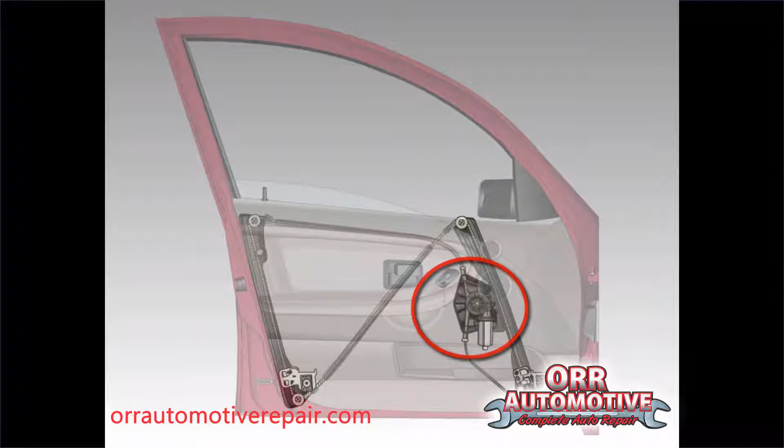The window regulator is connected to the window motor. As the window motor turns, it rotates a large pulley that pulls a cable guided by other pulleys. Window clips attach the window glass to the cable, and as the cable moves, the window is raised and lowered. Reversing the polarity on the window motor changes the direction that the motor turns.

Typical failures of the window regulator include broken clips, pulleys, and cables. Broken clips cause the window to become wedged in an angled position inside the door. Broken pulleys cause the cable to become bound, and the window becomes stuck in place. Broken cables cause the window to drop down into the door.

Another common failure of the power window motor is an overheated motor. Motors can overheat due to internal problems and will not have the power sufficient to raise or sometimes lower the window. As soon as the window motor cools down, the window will raise and lower again for a time until the motor overheats again. Sometimes a window may only travel a very short distance until the window motor overheats.

In some vehicles, the motor and regulator can be replaced independently. However, in most cases, the motor and regulator are replaced only as a complete assembly.

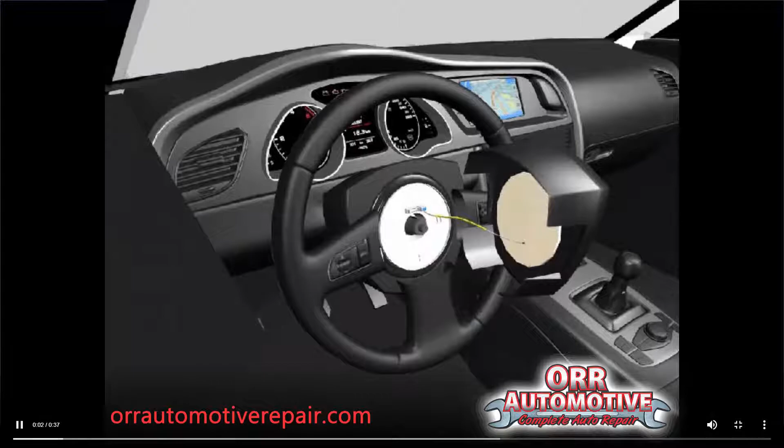The ribbon cable inside a clock spring has multiple copper tracks, allowing the various steering wheel mounted buttons and the airbag to be connected to the wiring harness. When the clock spring is installed, it is normally preset to a middle position that allows the steering wheel to rotate through its full range in both directions, without making the coils of the ribbon cable too tight.

A break in one of the copper tracks of the clock spring ribbon cable will cause the failure of one or more steering wheel buttons, or the airbag circuit. If the airbag circuit fails, the warning light on the instrument panel will illuminate.

Many vehicles use seatbelt pretensioners to reduce injuries in an accident. The pretensioner is usually an explosive charge designed to retract the seatbelt when a crash is detected by the collision impact sensors. When a collision is detected, an explosive charge is detonated, which shoots ball bearings out of a tube.

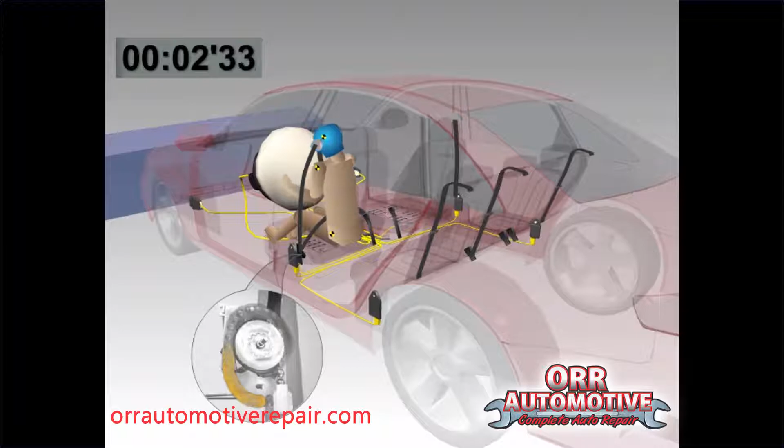As the bearings move past the seatbelt reel, the reel is turned, causing the seatbelt to be retracted and the occupant to be pulled back into their seat. This lessens the effects of whiplash and the potential of injury from the inflating airbag. After a pretensioner has detonated, the seatbelt normally becomes jammed. An exploded pretensioner must always be replaced.

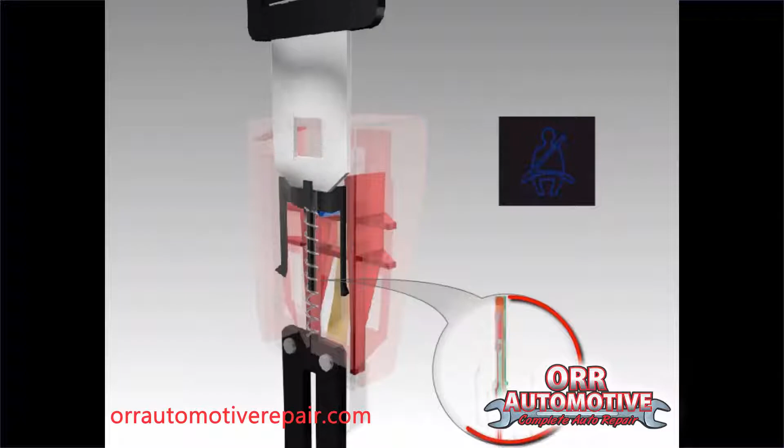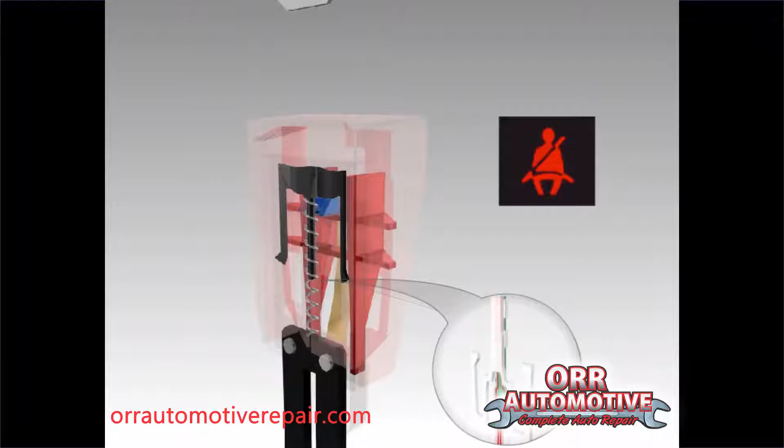The contacts inside the seatbelt latch are usually made up of a copper strip on a small printed circuit board. Releasing the buckle turns the seatbelt light on. Inserting the buckle opens the circuit and turns the light off. Some latches contain two switches. One switch operates the light, and the other sends a signal to the airbag module as to whether the seatbelt is being used.

Many vehicles now use seat occupancy sensors that detect whether the seat is occupied and the approximate weight of the occupant. This information is used to determine whether, or in some cases how quickly, to inflate the airbag and activate seatbelt pretensioners.

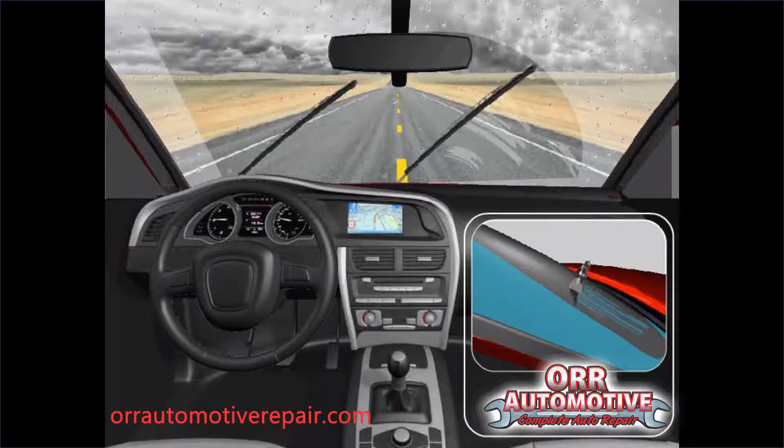Worn wiper blades are usually caused by exposure to sunlight and extreme temperature changes. Blades can fail in many ways, but the most common type of failure is deformation of the wiper blade. This occurs when the wiper blade becomes hardened and retains the curved shape that it takes when the wipers are parked. A wiper in this condition is not able to clean a windshield properly and often skips or chatters across the windshield.

Vehicle headlamps have improved significantly over the years, improving road visibility and safety. The latest technology in headlight systems uses LED lights, which are brighter and more efficient than halogen or high-intensity discharge xenon bulbs. Even when your headlight bulbs are functioning correctly, the amount of light hitting the road can be significantly reduced due to oxidization or discoloration of the headlamp lenses.

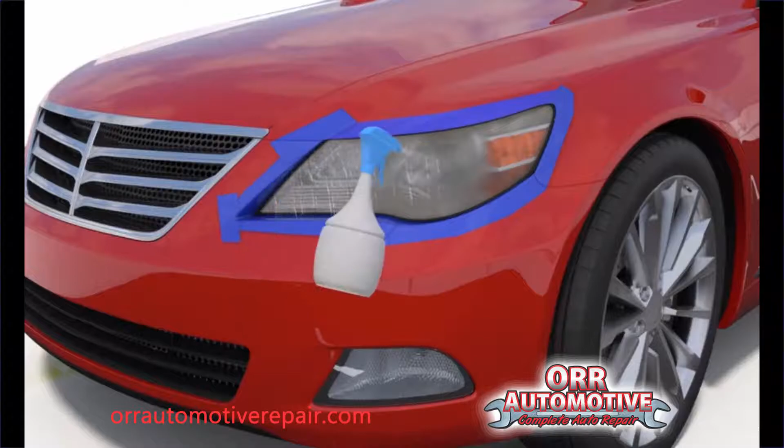Fortunately, it's possible to restore the performance of your car headlamps without replacing the lens. Your technician will mask the body panels around the headlamp to avoid any accidental damage to the paint, use specialized abrasives to remove the oxidized surface on the headlight lens, and then polish the light to restore a clear finish that allows the light from the bulbs to shine through clearly. With restored headlamp lenses, your nighttime view of the road will be much clearer, and your vehicle's appearance will also be refreshed.

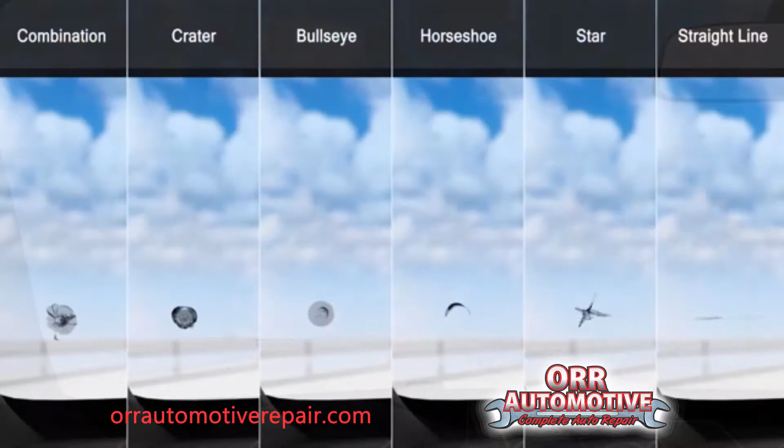Cracked windshields are more susceptible to breakage, provide less support to the airbag in the event of an accident, and reduce visibility. Unrepaired chips can develop into a crack at any time, but especially when the temperature is very hot or cold, resulting in the need to replace the windshield.

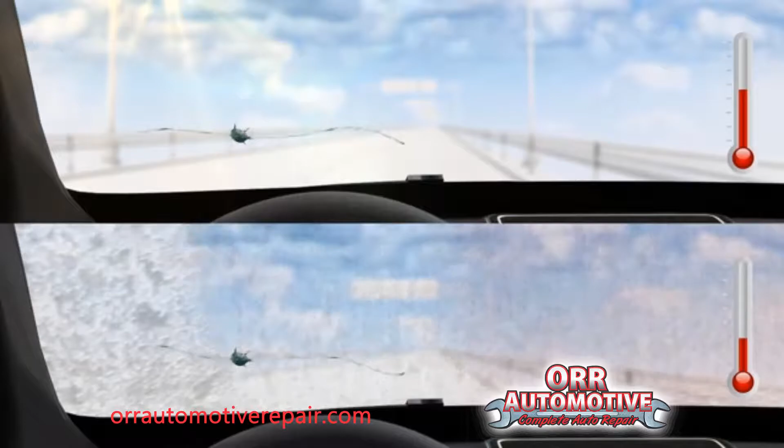The chip can be repaired if the following conditions are met. If the chip is in the driver's line of sight, the diameter must not exceed ½ inch. In other parts of the windshield, the chip diameter must not exceed 1 inch. The chip must be more than 2 inches from the edge of the glass.

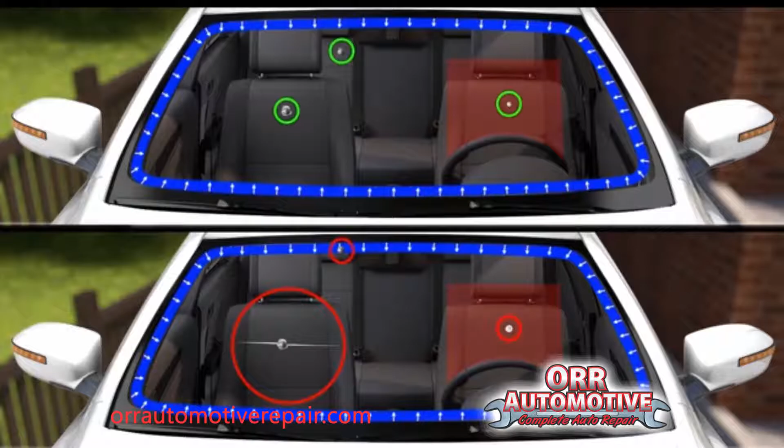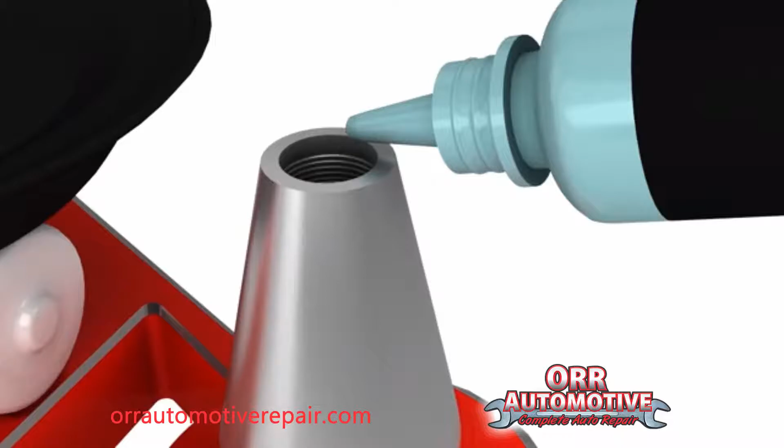The chipped area is prepared by using a cleaning solution, then a special drill to remove loose glass and allow the resin into the damaged area. After the area is prepared, a vacuum device is placed over the chip. With the air removed, the chip is filled with a special resin, and the resin is cured or hardened using

ultraviolet light. To ensure a smooth surface and to remove any excess resin, the windshield is cleaned and polished. After the resin is cured, the windshield will be as strong as it was before it was chipped.

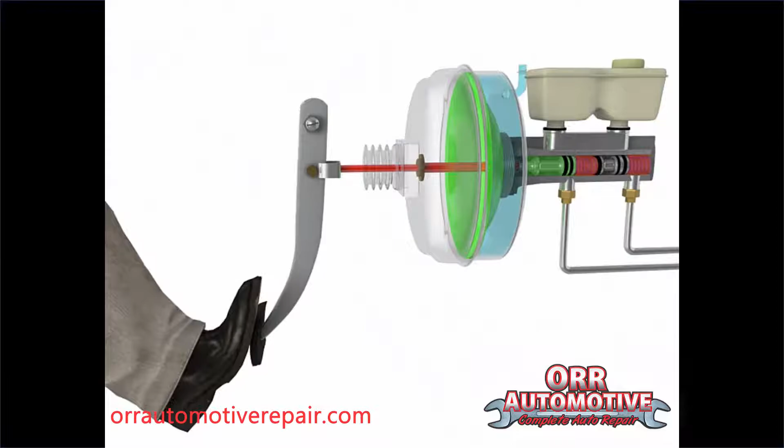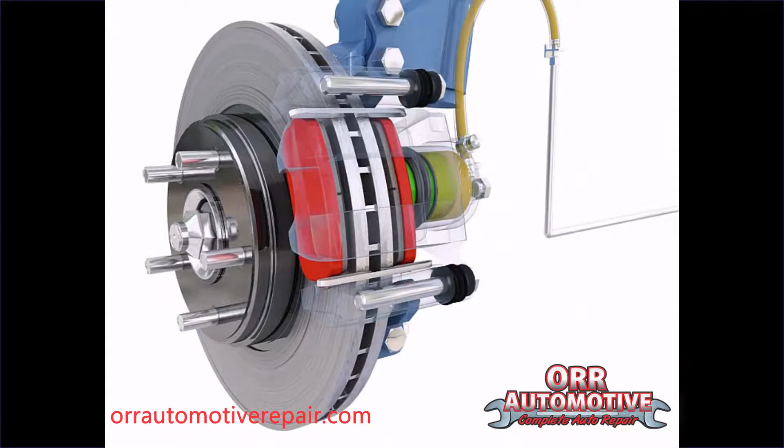Brake systems generally consist of a vacuum booster to assist the driver in pressing the pedal, a brake master cylinder that pressurizes brake fluid when the pedal is pressed, metal brake lines, rubber brake hoses, disc brake systems, and on some cars a drum brake system. Most vehicles also have an ABS system designed to pulse the brakes on a skidding wheel when maximum braking pressure

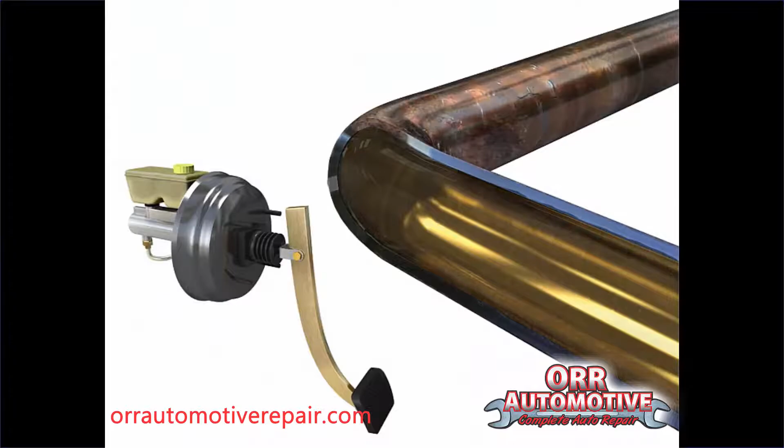is applied. In damp climates and areas where salt is used to de-ice roads, the metal brake lines can become rusted. Failure to replace rusted brake lines can result in the line rupturing under pressure, allowing the brake fluid to leak out of the system.

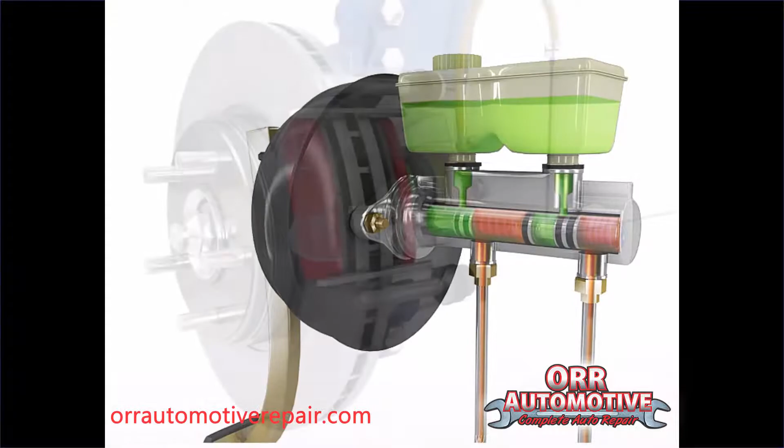When the driver presses the brake pedal, pressurized brake fluid forces the piston inside the disc brake caliper to move outwards. This forces the brake pads to push against the brake rotor. The brake pad has a block of friction material fastened to a metal backing plate. The friction material may be a ceramic, semi-metallic, or organic compound. The friction material wears out after many stops, at which time the brakes need to be serviced.

The piston inside the caliper has 2 rubber seals. The outer seal, or dust boot, prevents debris and moisture from entering the caliper. The inner seal, or square-cut seal, traps brake fluid inside the caliper. When the brakes are applied, the square-cut seal twists inside a groove in the caliper and then helps the piston to be retracted when the pedal is released.

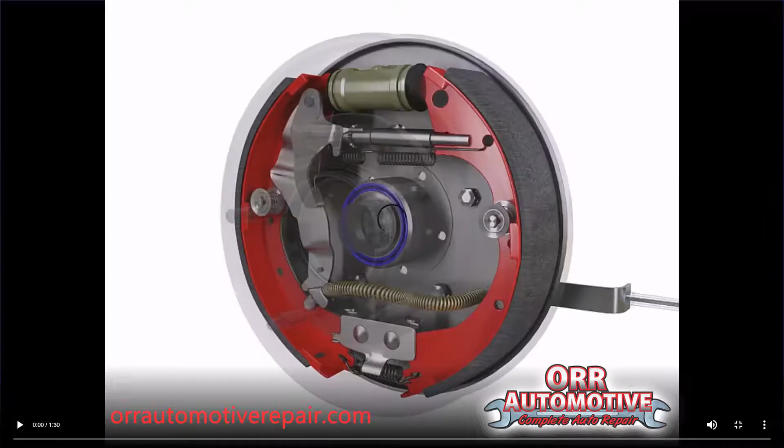The drum brake system includes a brake drum, hydraulic wheel cylinder, brake shoes, and return springs. Drum brakes are generally used to stop the rear wheels on older and lower performance vehicles. The drum is connected to either the rear axle or a wheel hub, and the wheel is bolted onto the drum. When the brake pedal is pressed, the pistons in the wheel cylinder move outwards as a result of the

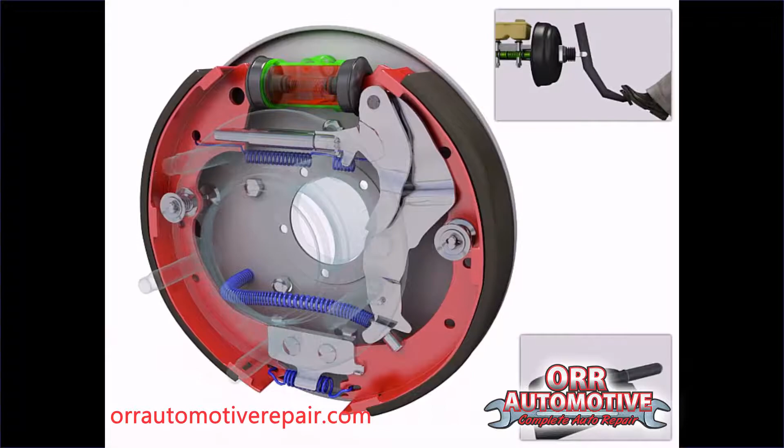brake fluid being pressurized. The brake shoes are forced against the inside surface of the brake drum in order to stop it from turning. This friction causes the lining on the brake shoe to gradually wear out, at which time the brake shoes should be replaced.

It is important that when brake shoes are replaced, brake hardware, including the brake return springs, should be checked for rust. Rusty return springs can break, allowing the brake shoes to remain in contact with the brake drum when the brakes are not applied, and causing the brake shoes to wear out prematurely.

A common failure of the drum brake system is a leaking wheel cylinder. When the seals around the wheel cylinder pistons start to deteriorate with age, brake fluid can leak past and start to contaminate the brake components. Once brake linings become soaked with brake fluid, they must be replaced.

Another failure of the drum brake system is an out-of-round brake drum. This occurs when the drum becomes more oval-shaped than perfectly round and can cause the brake pedal to pulsate under braking.

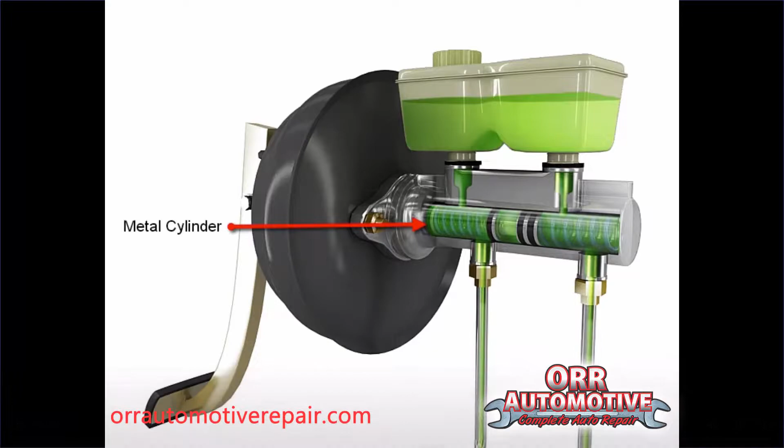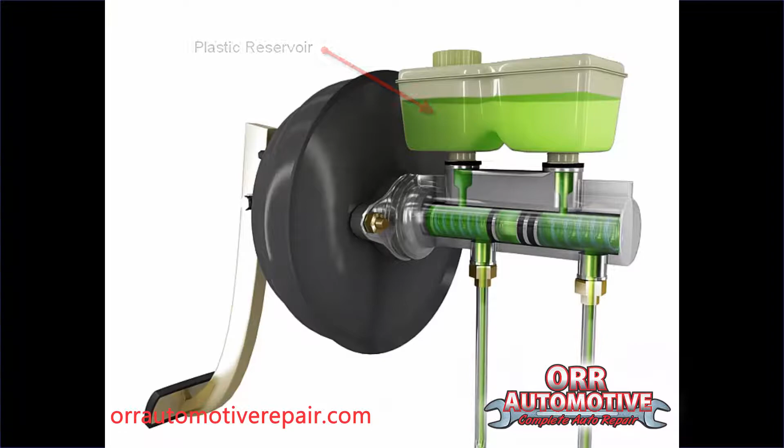The brake master cylinder assembly is a metal cylinder containing 2 pistons with seals and springs, with a plastic fluid reservoir located on the top of the metal cylinder. The brake master cylinder is usually located at the back of the engine compartment, on the driver's side of the car. When the driver pushes on the brake pedal, a rod from the pedal to the brake master cylinder forces the pistons inside the master cylinder to compress the hydraulic brake fluid. The pressurized fluid, in turn, forces the brakes on each wheel to apply.

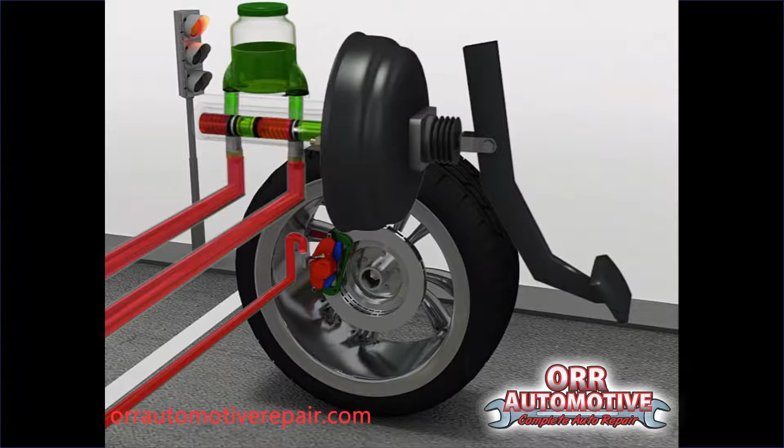Leaking seals inside the brake master cylinder can result in the brake pedal moving to the floor when the brakes are applied. A small leak normally makes the brake pedal slowly drift to the floor when sitting at traffic lights with the brakes applied. A major leak will cause the pedal to move to the floor quickly with the brakes failing to apply. When there is a leak somewhere in the brake system, either in a hose, line, caliper, or wheel cylinder, the brake master cylinder is unable to pressurize the brake circuit.

This video shows a crack in the metal line exiting the master cylinder. When a leak like this occurs, the brake pedal will often move much further than normal before the remaining functioning circuit is applied. As fluid continues to leak, the fluid level in the reservoir will start to fall, and the problem should be repaired before driving the vehicle any further.

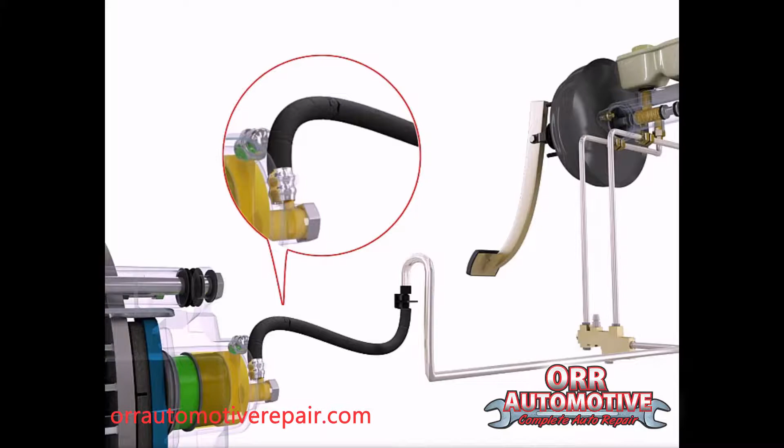Because wheels move in relation to the body of the vehicle as the suspension is compressed or the steering wheel is turned, a flexible brake hose is used to connect the steel brake lines to the calipers on each wheel. The brake hose is made up of three main components: an inner rubber hose, which contains the brake fluid, a steel braid that reinforces the inner hose so that it does not expand under the pressure generated when the brakes are applied, and an outer protective layer which keeps moisture off the steel braid and protects the hose from road debris.

When the outer layer cracks, moisture can enter the brake hose, allowing rust to develop on the steel braid. With a weakened steel braid, it is possible for the inner hose to expand like a balloon when the brakes are applied, leading to a potential rupture and the loss of brake fluid, and therefore stopping power. Once a brake line has ruptured, the brake system will not be able to build up sufficient pressure to stop the vehicle. To prevent the risk of brake fluid loss, brake hoses should always be replaced at the first sign of cracking in the outer layer.

When the brakes are applied, the brake caliper needs to be able to move freely so that even pressure is applied to both brake pads. This is done by mounting the caliper on slider bolts, smooth bolts coated in grease that can move freely in and out of the brake caliper mounting bracket. These bolts are protected by a rubber boot that keeps the grease in and contaminants out. When the boot is ripped, grease can escape and water can enter, causing the bolt to become seized in place.

When only one slider bolt becomes seized, it can cause the brake pads to wear at an angle. When both slider bolts become seized, the caliper is unable to move freely, which puts constant pressure on the inner brake pad, causing it to wear out sooner than the outside pad. If the caliper slider bolts become seized, the brake caliper should be replaced.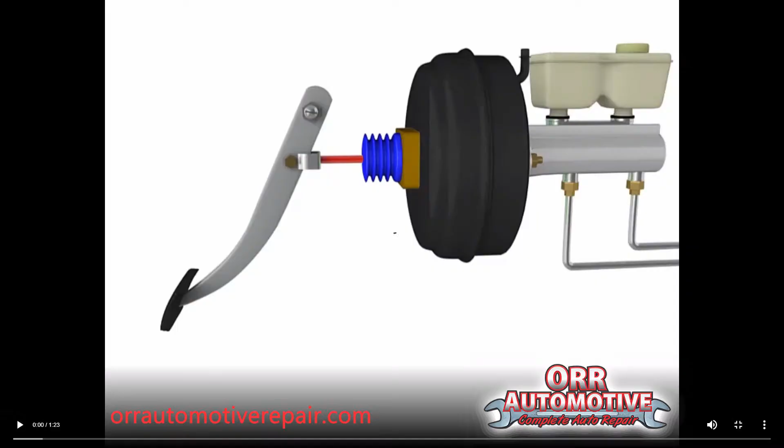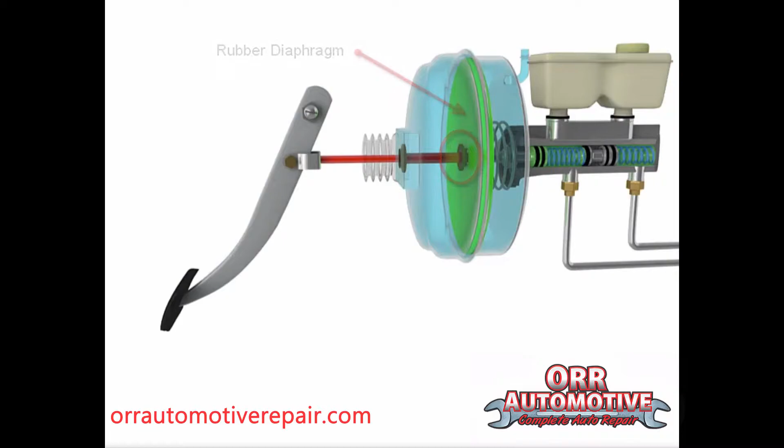The vacuum booster shown in this video has been simplified in order to demonstrate its operation. The vacuum booster has two valves, one that seals the booster from outside air, located by the brake pedal, and another that is positioned so that it can seal the rubber diaphragm in the middle of the booster. The vacuum booster assists the driver in applying more force to the braking system. When the brakes are not applied, the valve on the diaphragm is open, allowing vacuum to fill all of the brake booster so no assistance takes place. The valve on the pedal side is closed, sealing the booster so that the engine vacuum is trapped inside.

When the brakes are applied, the diaphragm valve closes and the pedal valve opens. In this mode, ambient air pressure fills the pedal side of the diaphragm, but the right side remains under vacuum. The higher pressure in the chamber closest to the pedal pushes the diaphragm away from the brake pedal and assists in the braking effort. The most common failure of the brake vacuum booster is a tear in the rubber diaphragm.

When the brakes are applied, air enters the chamber closest to the pedal. However, it also enters the adjacent chamber through the tears, reducing the pressure difference between the two chambers. Since both chambers are equal in pressure, the vacuum booster is unable to assist in braking, and the brake pedal is very difficult to press.

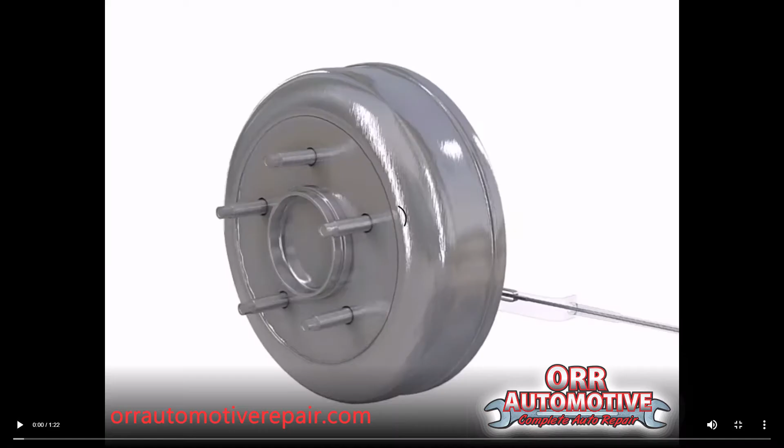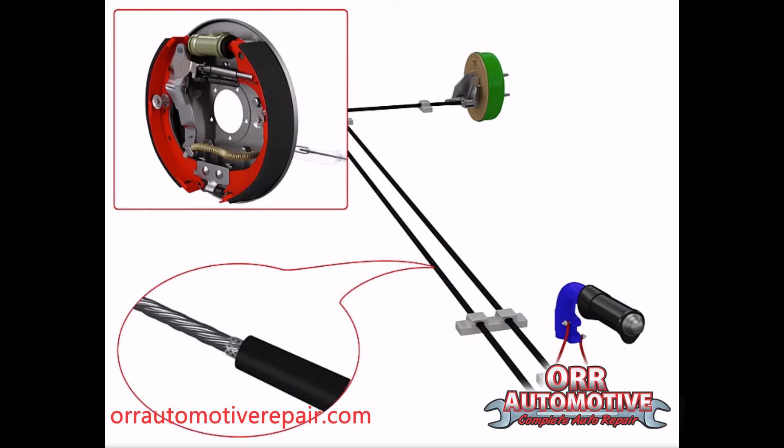Parking brakes can be incorporated into disc brake systems, but the majority of parking brakes utilize the drum brake systems. When the drum brakes are applied by the driver's foot on the brake pedal, hydraulic fluid forces the wheel cylinder to expand and apply the brakes. The parking brake is almost always operated by a cable, not by brake fluid pressure. When the parking brake is applied, a cable pulls a lever which forces the brake shoes to spread apart, pushing them against the inside of the brake drum to stop the vehicle from moving.

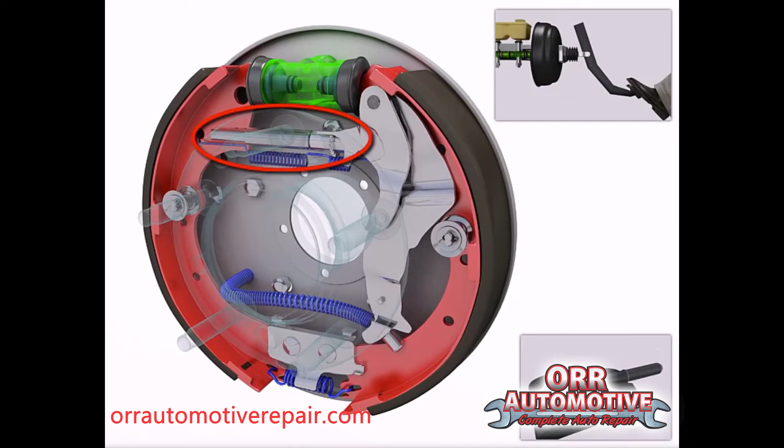The park brake also operates the auto adjuster inside the brake drum. The auto adjuster is the bar that goes between the two brake shoes. The star-shaped wheel or gear is attached to a threaded bolt. Each time the park brake is applied and released, an arm tries to turn that star gear to ensure that the brake shoes remain close to the drum, but not touching when the brakes are released.